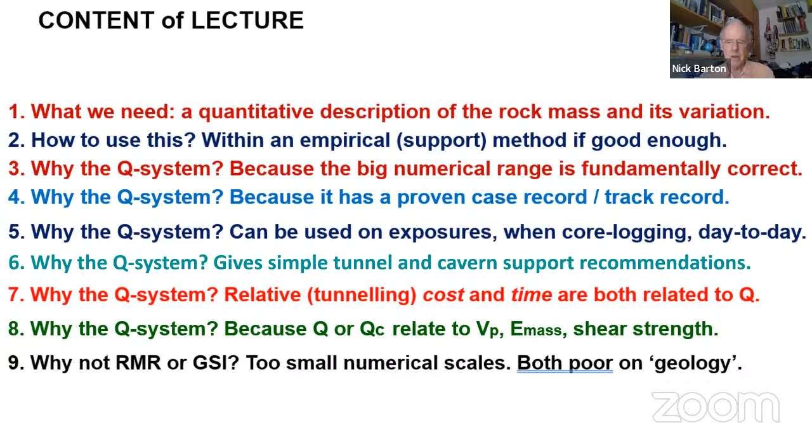So why not RMR or GSI? I think these have too small numerical scales, like 5 to 95, and I think they are both a bit poor on geology. That is my opinion. Especially they don't consider the number of joint sets specifically. Next slide, please.

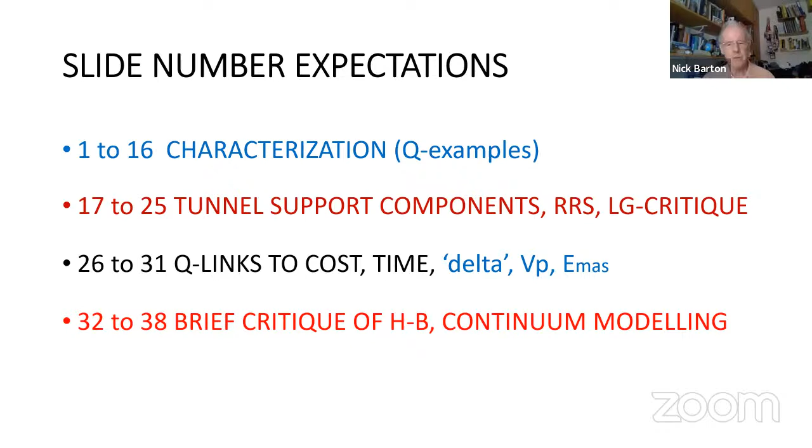So just for a little bit of organization, you'll see the first 16 slides is to do with characterization with photographs of Q examples. Then quite a lot about tunnel support components, including RRS and lattice girder critique. And then some of these Q links to cost and time and deformation delta and VP and EMAS, sorry for the spelling mistake. And the last part, a very brief critique of Hoek-Brown equations and continuum modeling. Next one, please.

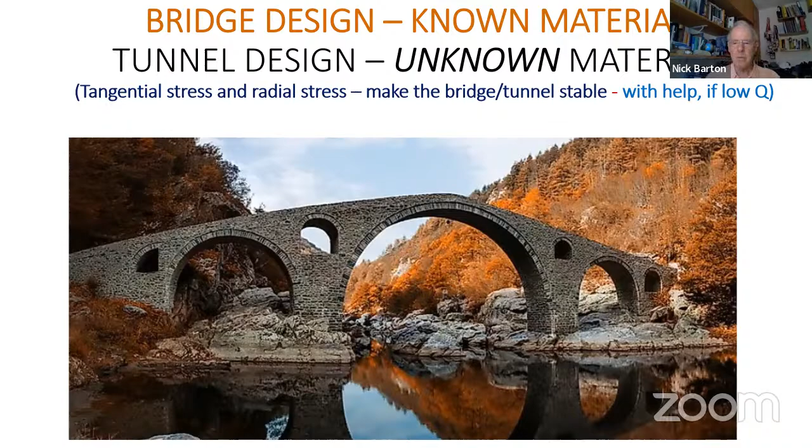So in bridge design, basically one is using hopefully known materials, yeah? And in tunnel design, we have unknown materials, or it depends how well we investigate, how well they're known. And in both cases, we're using tangential stress and radial stress to make the bridge or the tunnel stable. And if the Q value is low, we need some help with the support - if the Q value is too low.

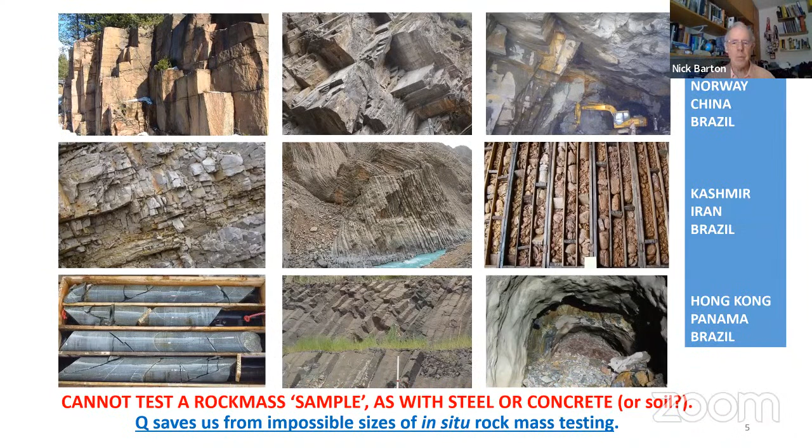So with these thousands of photographs, hundreds of projects, many tunnels, and 40 countries so far and counting, one basic problem is that all the photographs and the rock masses, they're different. So we really need a day-to-day treatment.

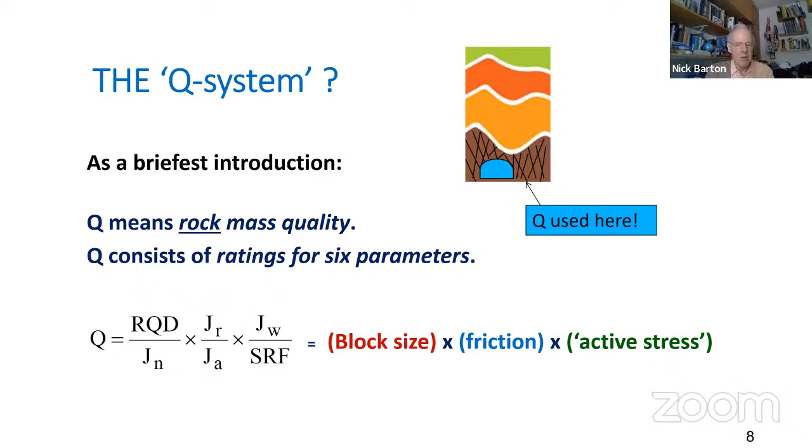So those of you who may not be familiar with the Q system, we use it down in the jointed area and another 1,000 or 2,000 meters below that. We leave the green and the orange for the soil mechanics people. So Q means rock mass quality or lack of quality, and there are ratings for 6 parameters that you see. And in pairs, they look like block size and interblock friction, something we call active stress. Next one.

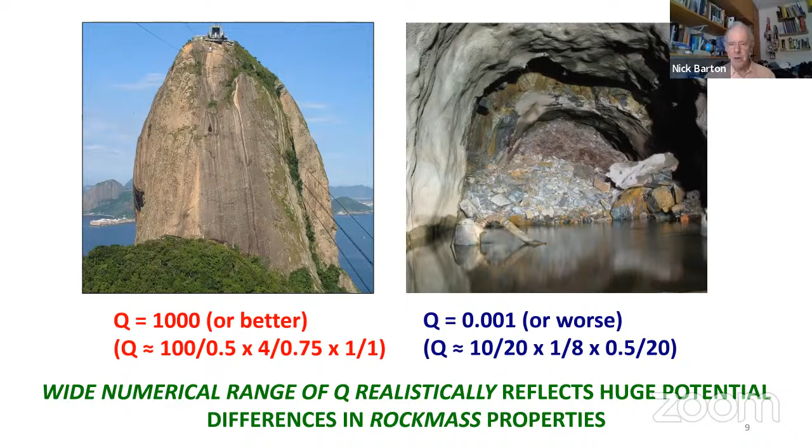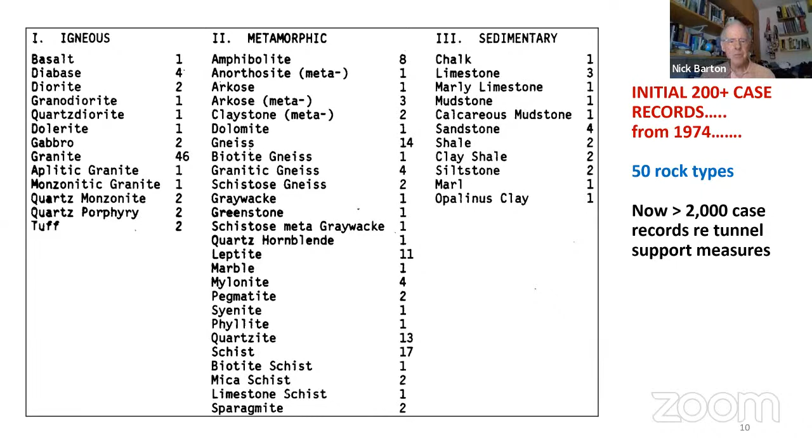Surprisingly, the first 200 case records, when developing Q, already included 50 rock types, a lesser number of sedimentary rocks.

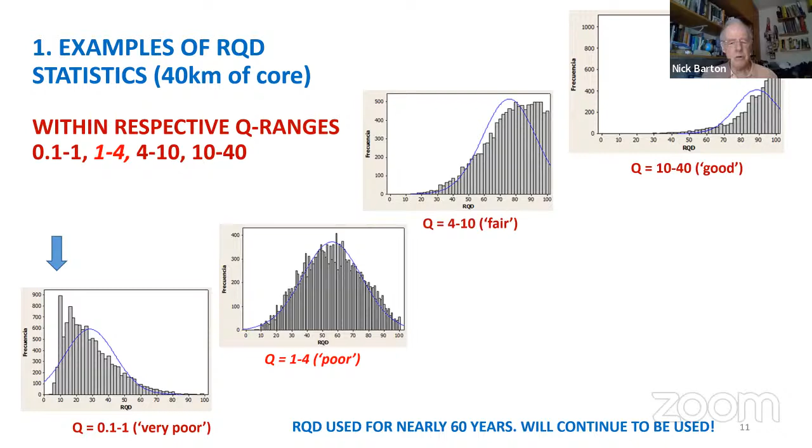If we look at Q equal 1 to 4, the bell-shaped curve, that's a nice demonstration of the usefulness of RQD in setting the stage for moderately low, medium Q values that we call poor. RQD has been used for 60 years, and I'm sure it will continue to be used.

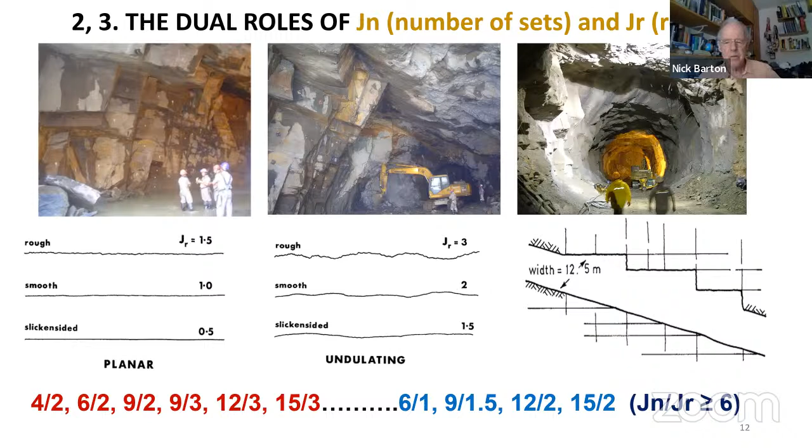Here I've combined the second and third parameters, the number of joint sets JN and roughness JR. In the red numbers at the bottom, you see ratios. The red ratios would be conditions that generally don't cause overbreak, and the blue ratios, as in the photographs, cause overbreak in general because of lack of roughness and too many joint sets. When Jn over Jr is 6 or more, you more or less have overbreak that's difficult to avoid, even with careful blasting.

We're still on the third parameter. This shows a range of roughness getting more and more. We're allowed to use JR of 3.5 if we think it's more than 3 - there's no problem there. So JR determines dilation angle, stability, overbreak, and even failure when the roughness is lacking.

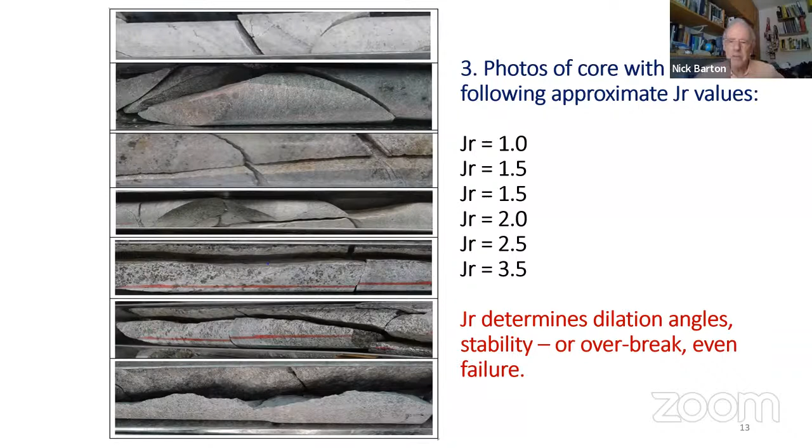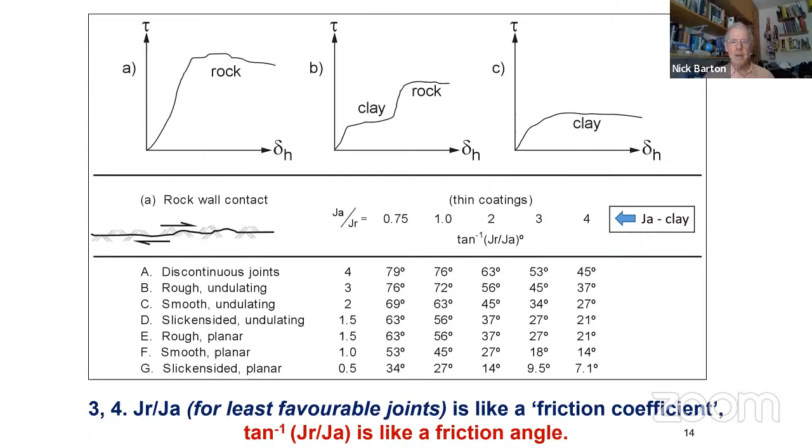Here I've combined the third and fourth parameters, JR over JA. By a miracle, really, the case records on their own gave this ratio in numbers, and when you convert it to tan inverse of JR over JA, it turned out to be like a friction angle. I had nothing to do with that - the case records gave this all on their own. That table shows friction angles one is familiar with. The top left may be phi plus i, or phi plus dilation, and the bottom right may be phi with a contraction.

Q is only part of the rock mass description exercise. On the right you see the 3 pairs of Q parameters. There are a lot of other parameters we collect when describing a rock mass, and if we're doing numerical modeling, quite a lot of the group 2 parameters, the joint character, will be collected. On the left is a way of presenting a large number of Q parameter ratings for RQD, JN, JR, JA, and so on. I will talk very little about JW and SRF - you just see glimpses of them. We've basically covered the first 4 parameters.

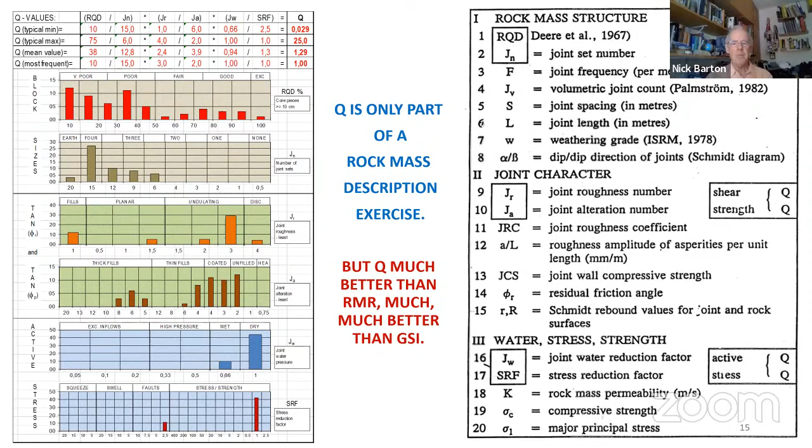Now to support methods for tunnels - more about NMT, empirical, monitoring only with large spans. We don't need to monitor smaller tunnels because we know what the behavior is likely to be if we get the Q value right. We're not going to talk about NATM, but I will show 1 or 2 pictures. It's semi-empirical, and we need careful monitoring.

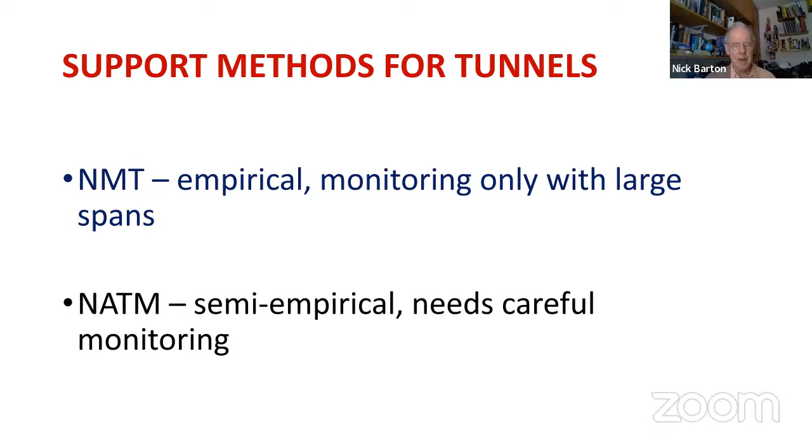So thanks to a publication of NATM, AGS 2010, those are nice diagrams of NATM. We're not going to talk about that, we're going to concentrate on the left side. If you go down those diagrams vertically, 1, 2, 3, 4. In 4, you see two gentlemen up in a cage, and they're inspecting the rock, seeing what the rock quality is likely to be on the next round.

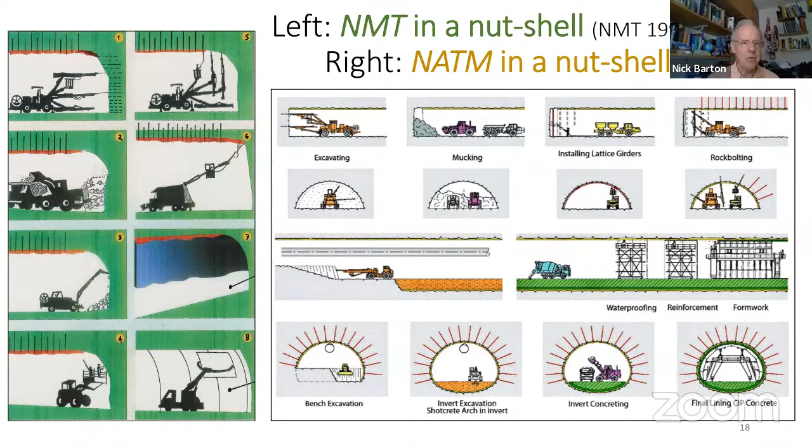The bolt spacing there is exaggerated. It's from a brochure that was made about 30 years ago. We'll see details of bolt spacing in a moment.

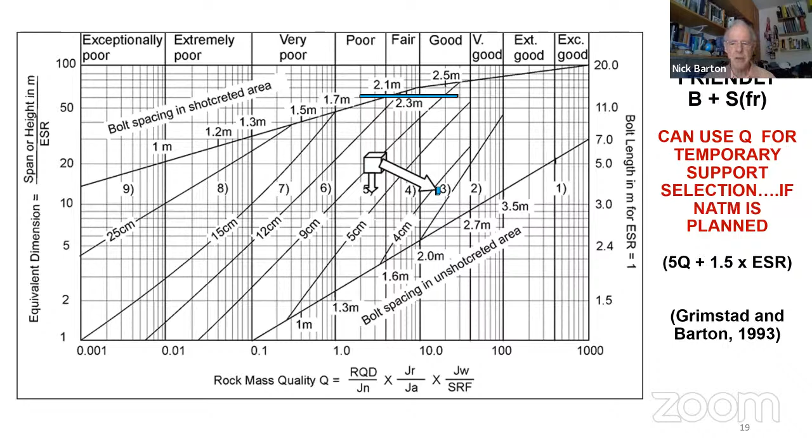So this is the support diagram that was developed by Grimstad from lots and lots of case records. If we go across lower down on the left, you see this arrow going 4, 5, 6, 7, the different thicknesses of shotcrete. And in the top diagonal, you see the reducing spacing of the rock bolting as the Q value is getting less. We can use this diagram for temporary support estimation by using 5Q plus 1.5 times ESR.

So here, photographs of the bolting and fiber reinforced shotcrete, which is preferred to bolting and mesh reinforced. The diagrams are very realistic, actually, from Vandevall, 1991. And we also like the CT bolt with extra corrosion protection.

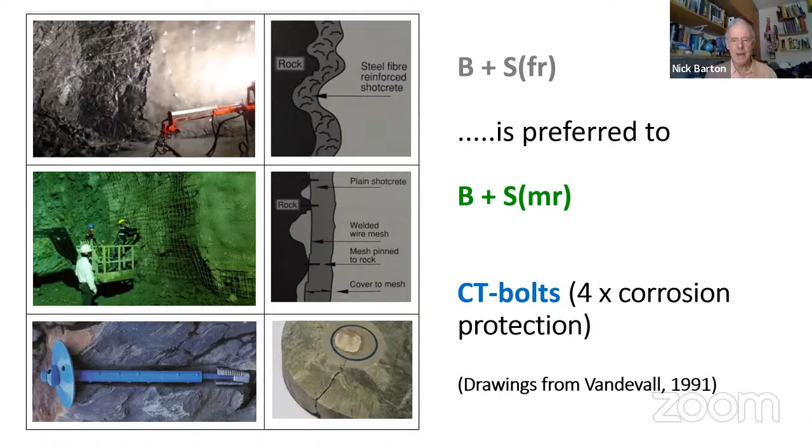There are still four layers of protection after a joint has moved and cracked the outer grout. The bolt is galvanized and epoxy painted, then there's the inner annulus of grout and a PVC tube. So those are really permanent bolts. They cost a little bit more, but if you're relying on bolting and shotcreting for final support, that's important.

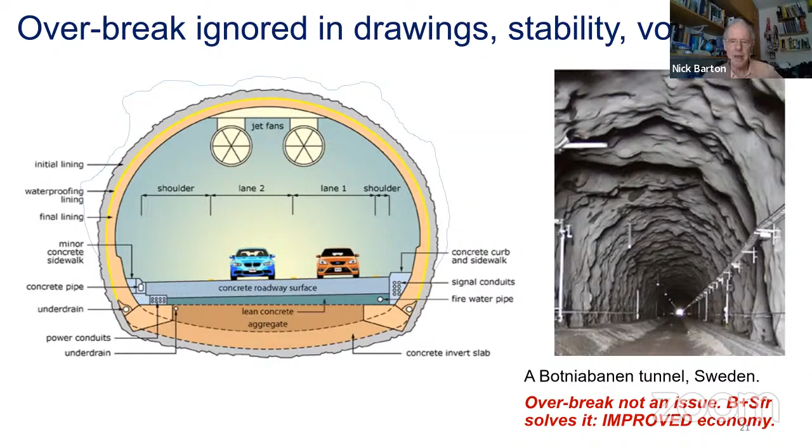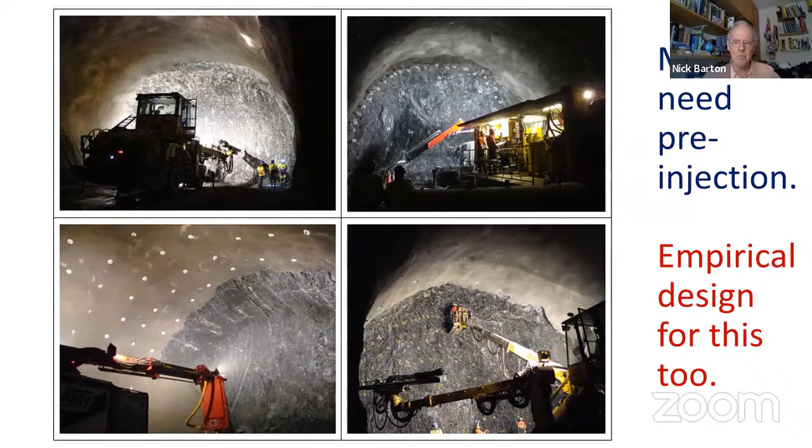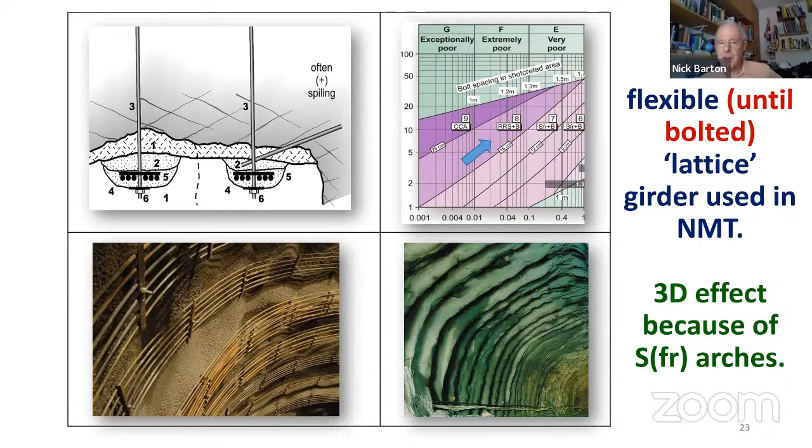So when conditions are really bad, we're in where the blue arrow is in the Q support diagram. We use RRS, rib reinforced shotcrete arches. It's like a bolted lattice girder, but it's more flexible until it's bolted. On the bottom left, you see photographs - they are 16 millimeter bars, which we can slightly bend into a major overbreak. We're not relying on a perfectly circular lattice girder. They're sprayed in, and it gives an extremely stable condition where conditions are bad, and may be combined with spiling, as you see in the top left.

So this is the best diagram to use for the dimensioning of RRS, thanks to the work of Grimstad and colleagues at NGI some years ago. It's the left side of these little white boxes that gives you the area to get the design in the box.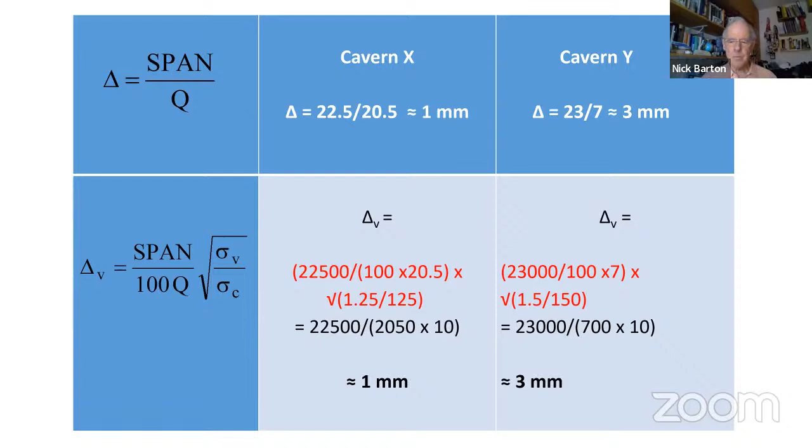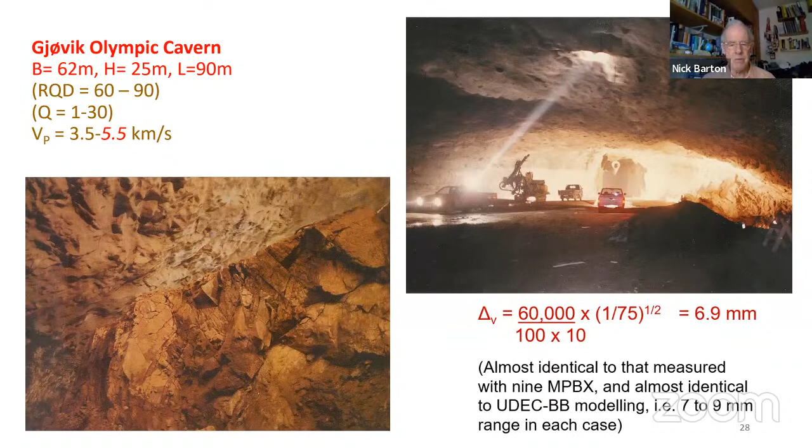Next, applying it to the Gjøvik cavern, we get about 7 millimeter predicted - you see the 60,000 millimeter span in that red equation. This is almost identical to the MPBX monitoring from nine MPBX placed from the surface, and it's also identical to the UDEC BB modeling, which gave roughly 7 to 9 millimeter deformation.

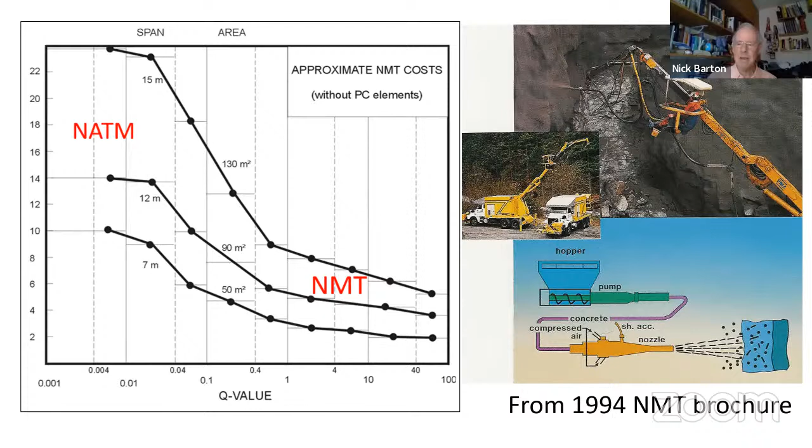Here I've used the Q system for arch and wall support for 3 different sizes of tunnels: small, medium, and a large motorway tunnel. You see the typical relative costs for NMT in the bottom right, and the relative cost for NATM, because you end up with a concrete liner, as some NMT case records would also require - we also use concrete lining if the quality is really bad. On the right, there are photographs from an NMT brochure from 30 years ago, showing a specialty: we like the operator high up on the boom to do the best shotcreting, especially in big tunnels, caverns, and slopes.

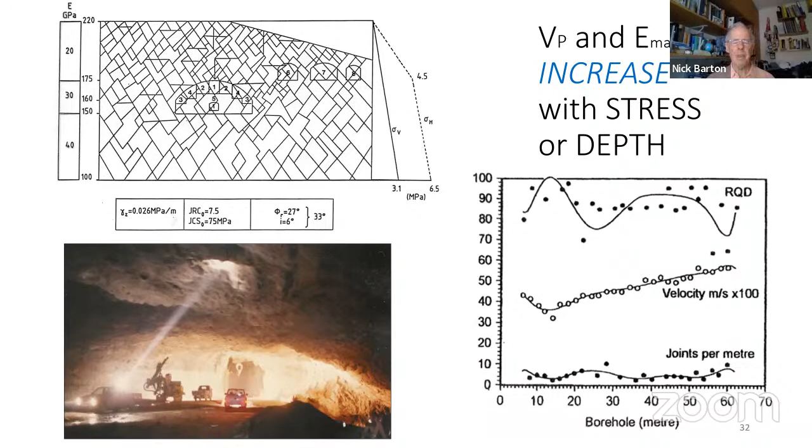We can estimate a relationship from empiricism between the P-wave velocity from shallow refraction seismic, the scale on the top left, and the Q sub C scale - that's the Q value normalized by sigma C over 100. Those two equations in blue and black show how you can estimate the E mass, the rock mass deformation modulus, as VP increases with depth, which it generally does. The depth dependence must not be ignored.

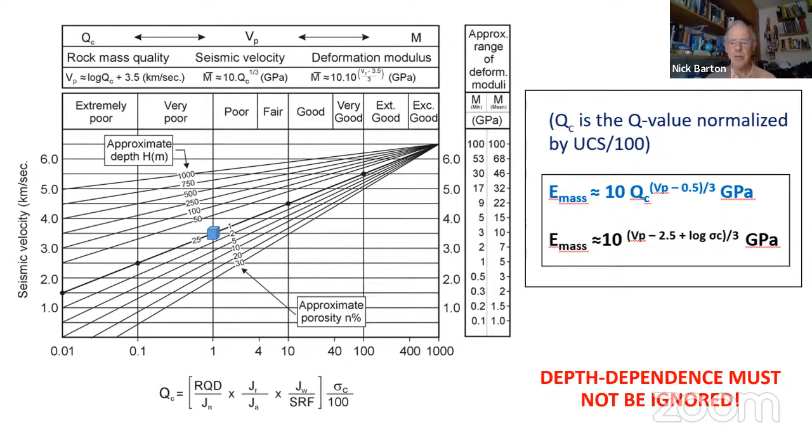To finally critique, on almost the last 2 slides, some modern trends.

So these extraordinary equations, I feel that they're extraordinary - they take such a long time to write unless you copy them. Amazingly, the GSI effectively appears 16 times in the equation for C and 12 times in the equation for phi. To me, GSI, although it's got geological in the name, isn't really geological, and it's not very easily quantified. And D is the disturbance factor - it's really a joker, because you can get nearly any result by varying D from 0 to 1.

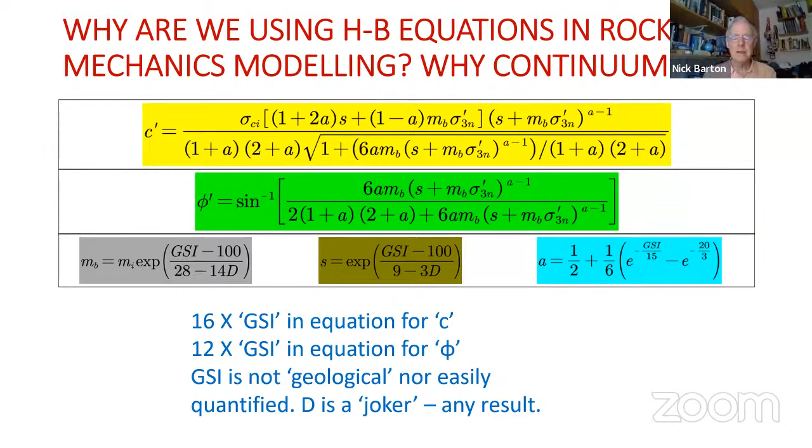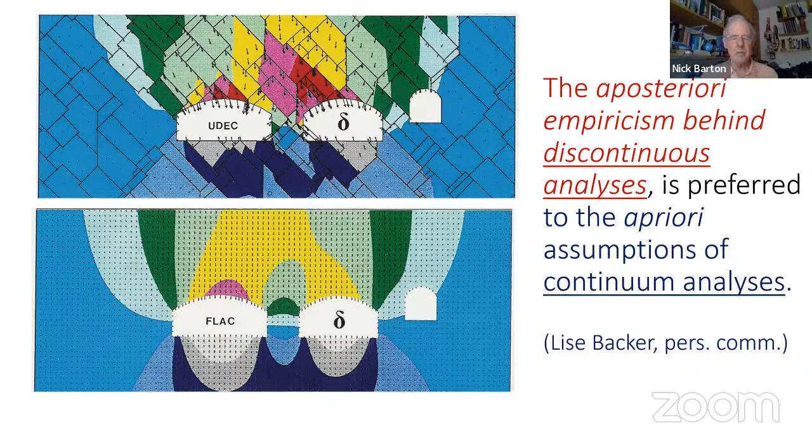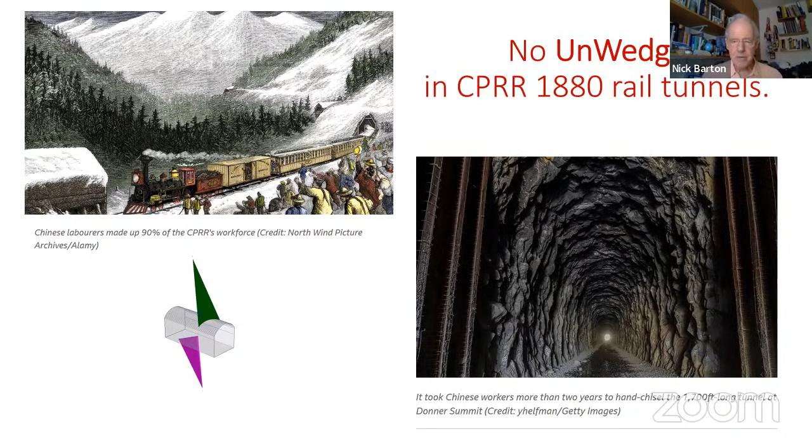So this is the end, and this is the same tunnel that you saw earlier with a very low inflow for 5 kilometers, and very high Lugeon range before the pre-injection. So pre-injection may be a very important part of NMT.

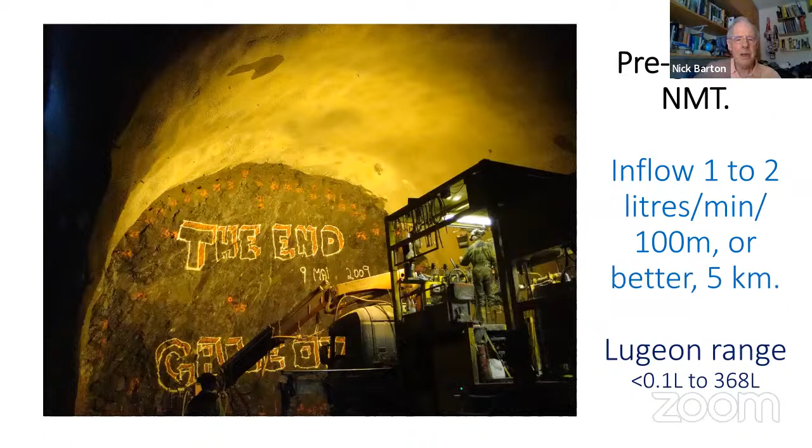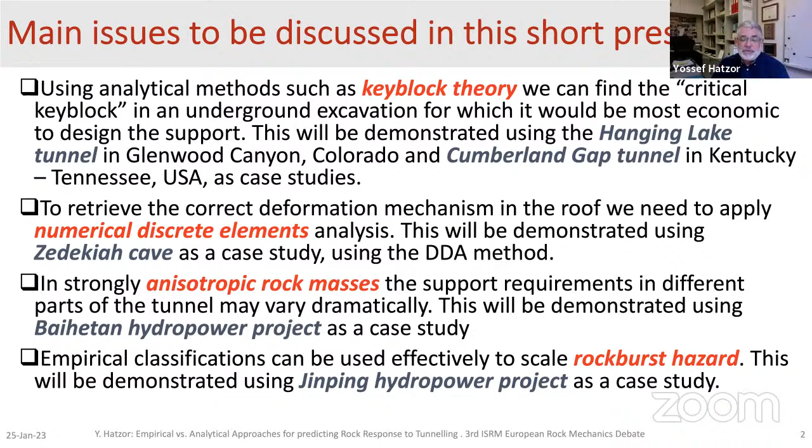As you all know, rocks are discontinuous, and therefore, as also reflected in the Q system, the discontinuities play a major role. What I want to argue here is that the orientation of the discontinuities cannot be ignored. So I'll go through several case studies, starting with 2 tunnels in America. This is from my PhD work. And in a sense, this presentation will go through my career, starting from the PhD work in the early 90s, through some works in Israel in the 2000s, and then in China between 2010 and now.

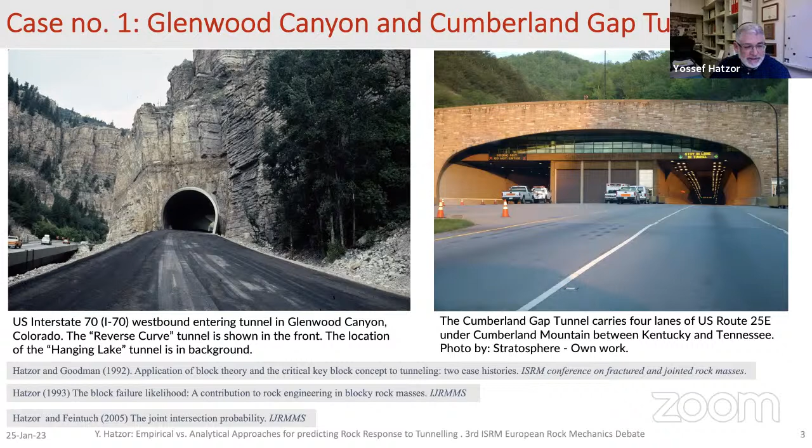So these are 2 tunnels that we used as case studies to validate block theory, and that was just then published. Together with Professor Goodman, we went to these tunnels and looked for evidence that block theory is indeed able to predict failures in the rock. So 2 tunnels, one in Colorado, the other in Tennessee, Glenwood Canyon and Cumberland Gap. And the work was published in a series of papers, as you can see there.

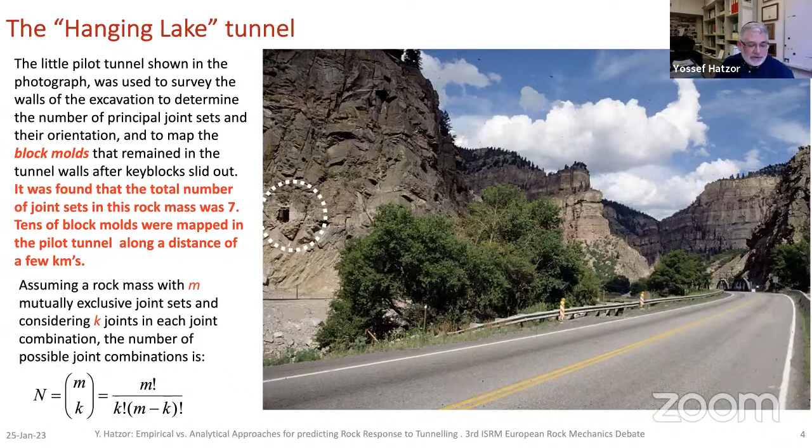So in Glenwood Canyon, they excavated this pilot tunnel. You can see that this pilot tunnel is within a wedge in the rock. And the rock mass turns out to have 7 joint sets. If you have 7 joint sets and you want to consider combinations of 3 joints in every block, you're going to end up with about 35 possible joint combinations. Now, that's not realistic. And why do I say 3?

Because we often find in the field that the blocks are tetrahedral, meaning there's 3 joints intersecting at a point in the apex, and then there is the free surface. And the reason they're predominantly tetrahedral is that the probability of obtaining 4 joints intersecting through the same point diminishes very rapidly to zero. Therefore, we always find tetrahedral blocks, and this is why we're going to have to analyze 35 different joint combinations.

Now, in each one of these joint combinations, there are theoretically 8 possible joint pyramids. If you're not familiar with block theory, here is an example from Goodman's book. We have 3 joint sets, and their intersections form joint pyramids in space. Each one has its own code, and Shi's removability theorem says that the removable joint pyramid is the one that is completely contained in the space pyramid. So we're going to have 35 theoretically removable joint pyramids from every free face. That's too many.

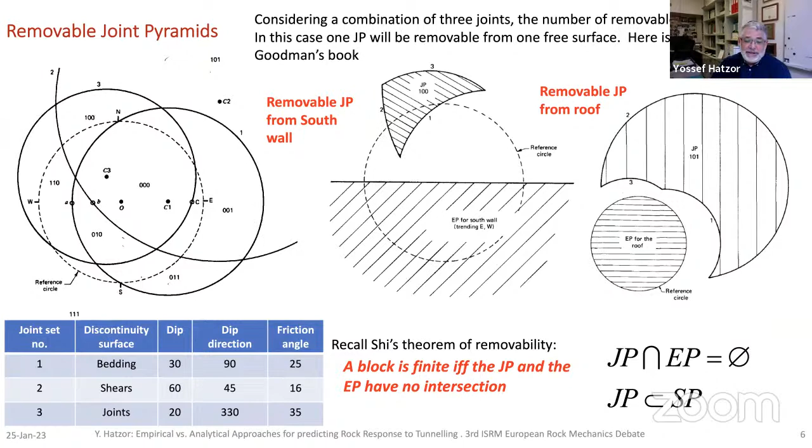And that's when I came up with the idea that the probability for different joint intersections is not the same. We came up with this concept of block failure likelihood. There are two criteria for this: one is the joint intersection probability, and then there's the stability of the removable joint pyramid that is formed. The joint intersection probability is simply inversely proportional to the volume of this parallelepiped. So the smaller the spacing, the higher the probability, making it occur more often in the rock mass.

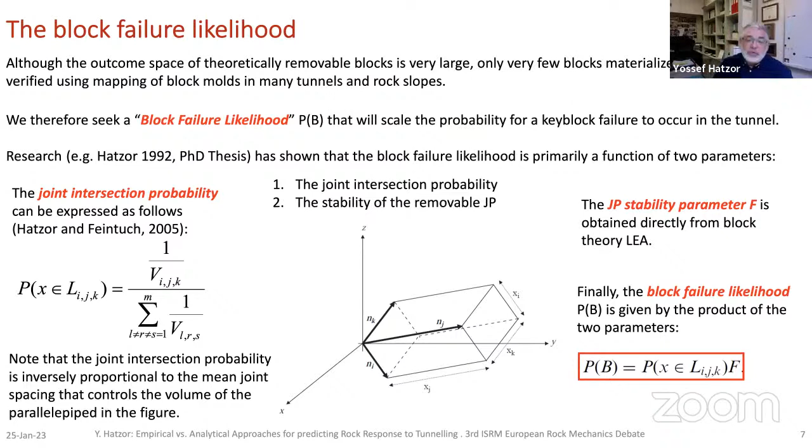And then we have to run through these occurrences a limit equilibrium analysis to weigh the stability of each of these removable blocks and come up with the block failure likelihood.

So a lot of these theoretical combinations don't yield removable blocks that we need to be concerned about. And that means that running such an analysis isn't so complicated. We can actually define one or two blocks that would be critical for a given free face, design for it, study its maximum length, and then dimension our support accordingly.

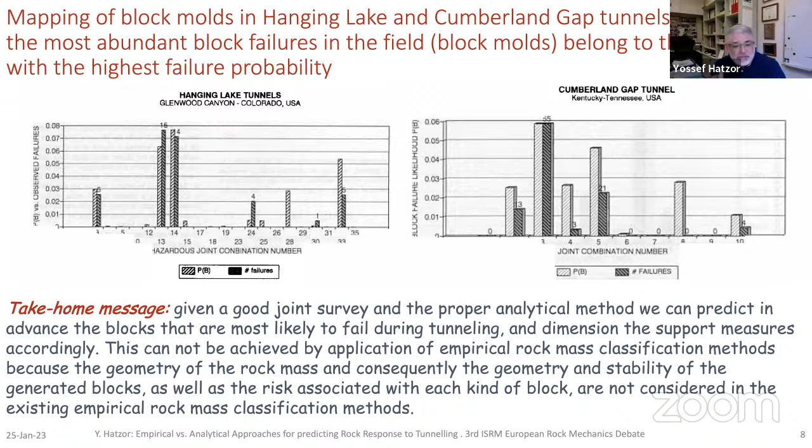So this is the issue of block failure likelihood. This is not something that can be done with conventional classification methods. I'm not distinguishing right now between the existing methods.

The other thing I want to point out is that the deformation in the roof is not only a question of rock mass quality, as Nick proposed with his empirical equation of span over Q. It's very interesting that he was able to validate that. But in fact, the interaction between the blocks in the roof plays an important role.

So this is just an example of a historic site. I spent a lot of time in my career working on preservation of ancient sites underground and on the ground, slopes, tunnels. This is the Zedekiah cavern underneath the old city of Jerusalem, and it's been standing there for at least 2,000 years, probably more like 3,000 years, anywhere between 2,000 and 3,000 years before present.

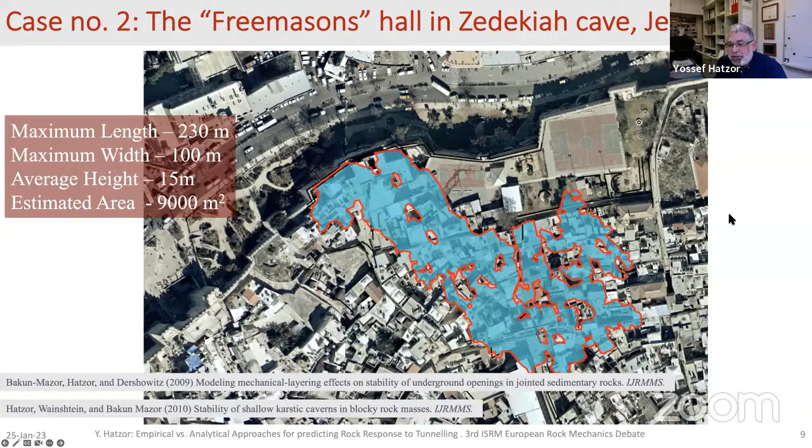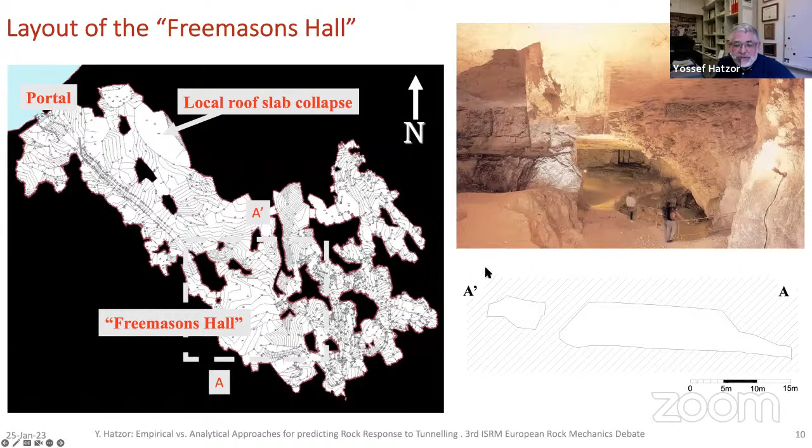Historians tell us that the dimension stones for the temple were quarried in that limestone quarry. Within this quarry we have a hall called Freemasons' Hall, because the Freemasons used to hold their initiation ceremonies there. Anyway, it's a large span room that has stood unsupported for thousands of years. The question is, why is it standing? How can it be stable for so many years?

If we run a clamped beam analysis on this layer of the roof, we get a maximum tensile stress of about 10.5 megapascals. But the tensile strength of the rock is only 2.8 megapascals. So if this was the model, it must have failed in tension.

If we go to Brady and Brown's book, where they discuss the voussoir analog, you divide the immediate roof into two blocks and let them rotate a little bit, developing compressive stresses here and here. Then there are three different kinds of failure modes that could happen: one is crushing under the maximum stress, one is shear along the abutments, and the third is a snap-through buckling mechanism.

Running this analysis on Freemasons' Hall gives us the buckling failure mode, because the layers are thin and the span is large. But it didn't happen. It didn't happen. So both methods of analysis don't work.

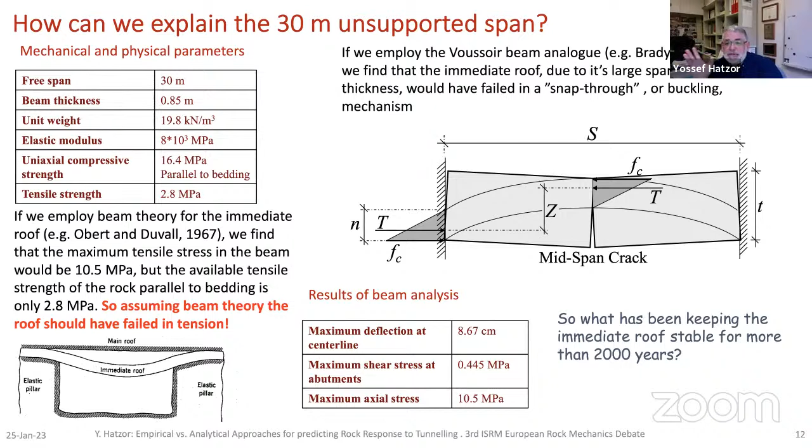This is my second point: we need to consider the interaction between the blocks. So here we have a DDA mesh of many blocks. Notice that the structure here is geological, not just vertical and horizontal lines cut together. You can see joints terminating against layers, cross joints and non-crossing joints. A lot of effort has gone into generating a mesh that properly represents the sedimentary rock structure.

And what's going on is you can see the arching stresses developing around the hall, and then some shear developing along those two abutments. But then after some shear, there is an arrest of the motion and a development of arching stresses through the immediate roof.

You can see it here. This is the vertical displacement. So if this is the lowermost layer measurement point, it goes down and then it stops. And that's when the horizontal stresses reach their maximum value and the displacement is arrested because of the arching mechanism.

I don't think we could have predicted this without applying a specific analysis that considers the interaction between the blocks. This is another issue that requires us, after we've established the rock classification, to go further to a more specific analysis considering the interaction between blocks.

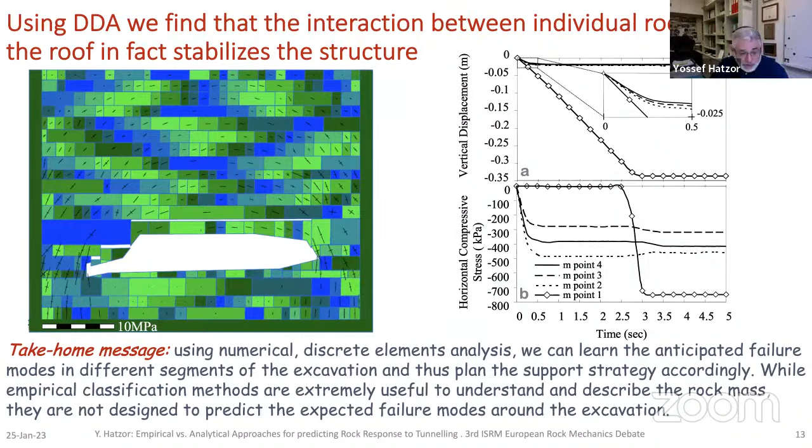The third case is from China, the Baihetan project. It's a huge hydropower project. You can see this river, which is on the boundary between two provinces, Sichuan and Yunnan. It's going to be 300 meters high.

And the geology is tricky. We have a contact here between columnar jointed basalt and sandstones, and everything is going to be within the columnar jointed basalt. You can see it's anisotropic, with prisms dipping into the tunnel. How do we handle that?

Again, we can draw a mesh. This photo tells us where we put the measurement points in the mesh. We do sequence excavation in the model, removing the top heading, then the center part, then the bench, and we study the deformation after imposing the initial stresses. This mesh represents the mapping exactly as it is in the field, with the initial stresses as measured in the field.

You see that the three immediate points, 1, 2, 3 in the roof are all sliding down. So 9 meters above the roof—this is just one of the powerhouses on the way—we see that the whole thing is sliding down. Now, the other measurement point, number 4, at a distance of 25 meters from the roof, stops; it doesn't slide. So somewhere between 9 and 25 meters above the roof is where it stops sliding. We need reinforcement that goes beyond those 9 meters.

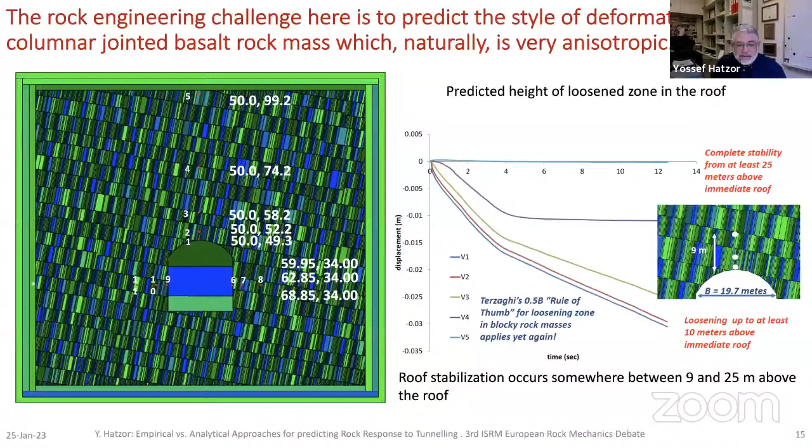Could this have been predicted without such an analysis? Moreover, you can see the deformation in the two side walls. In the right side wall we get sliding, and it tells us where the sliding stops, the loosening zone. In the left wall we see rotation—here's the rotation angle in radians. You see that point number 9 is actually rotating because of this structure that favors toppling.

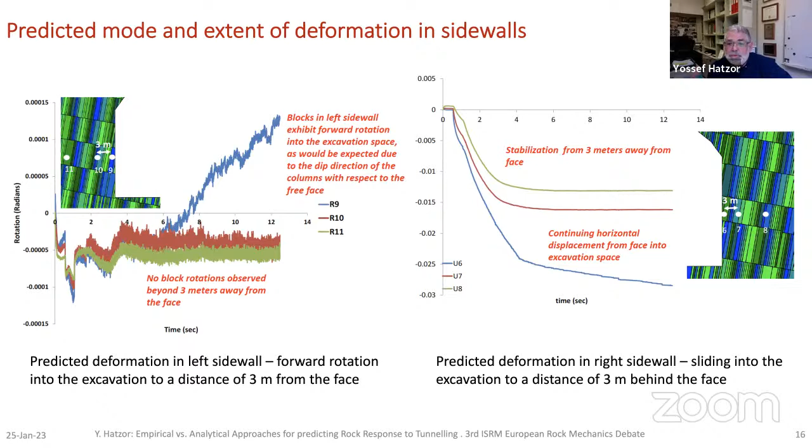So the third point I want to make is that applying such an analysis gives us the failure modes that will develop around the tunnel. To confirm this, the MPBX measurements show that the maximum displacement in the roof is about 9 meters above the roof, and then it stops at a distance of about 20, which is basically what we predicted, and the same with the side walls.

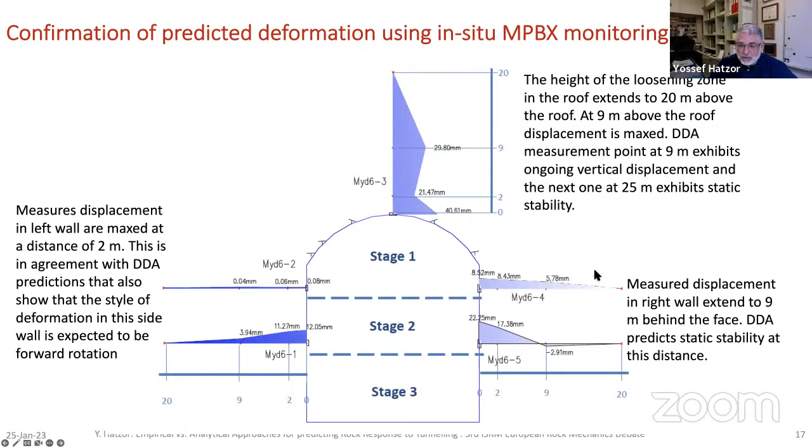Now, their approach to the support of this chamber followed T.A. Lang's guidelines for dimensioning rock bolt reinforcement. They came up with a length of 6 meters, spacing of 1 meter. They did some longer lengths on the sides, but basically the roof bolts here are only 6 meters long. As we saw in the analysis before, it's not long enough. The reason for this mistake is that they did not consider the structure of the rock, because T.A. Lang's guidelines take the average block size to scale the bolt length.

What I'm arguing is that in the roof, the average block size would be the distance between those basalt layers of the flows of basalt, so about 5 meters. If you go by the rule of 3B, you need at least 15-meter-long bolts. In the side walls, the width of the block is very small, about 30 centimeters, the width of the columns of basalt. So there we use the other criterion, about 1/4 of the span, which gives us 5 meters. If they'd gone with that approach, it would have been safe.

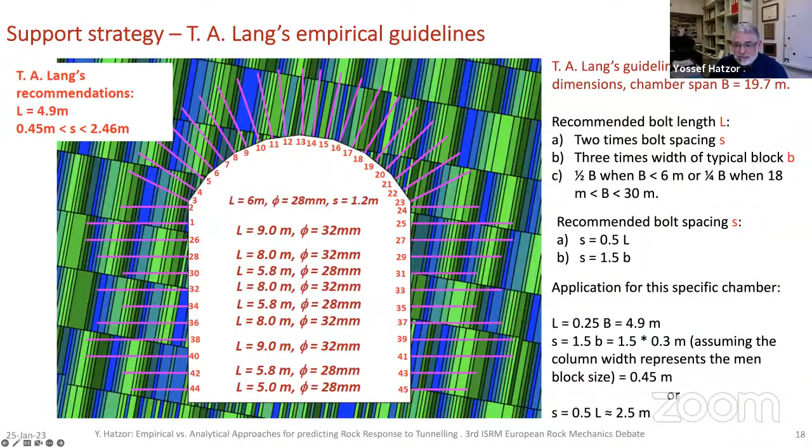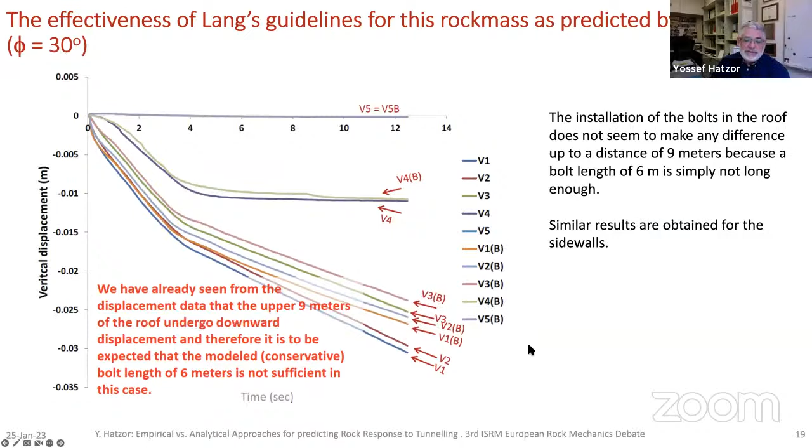You can see that when we apply the bolts the way they designed it, nothing happens—everything is sliding down because it's not long enough. If we consider the anisotropy of the rock mass, that requires 15-meter-length bolts or cables in the roof, and about 5 meters length bolts in the sidewall; then they would have been safe. So that's my third point, the consideration of anisotropy.

And finally, something that is in favor of classification methods.

I use the GSI here, but I could have done it just as well with RMR or Q, so please don't attack me for using the GSI, but I'm going to show you that classification methods can be very useful.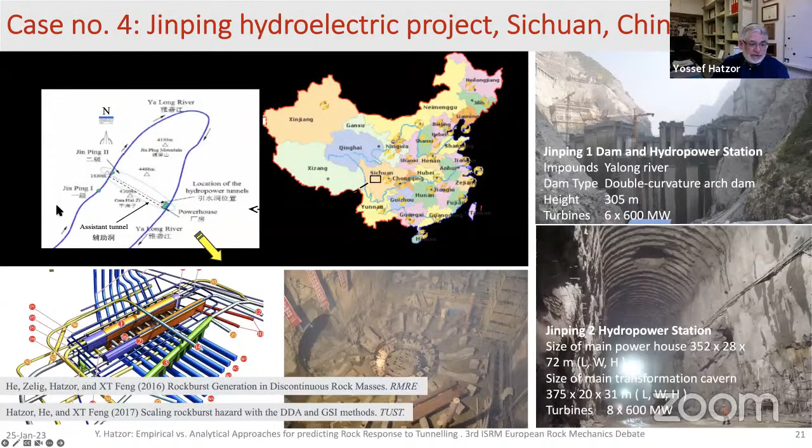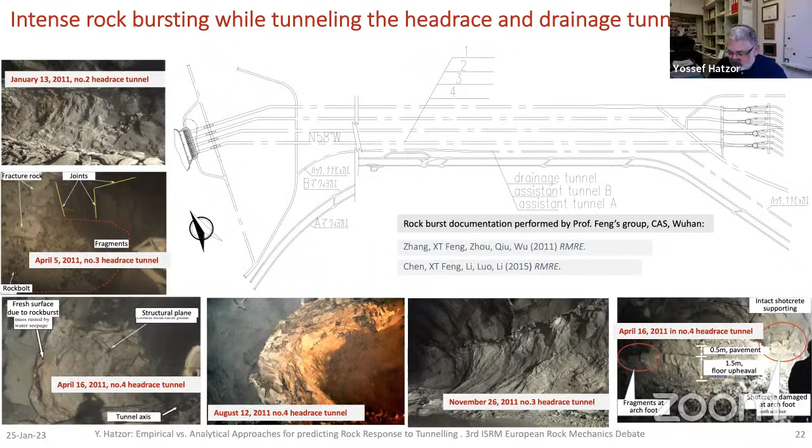What happened was that they encountered a lot of rock bursting while drilling, excavating those head race tunnels and the drainage tunnels. A lot of rock bursting, a lot of delays and a lot of risk for the workers throughout the excavation. And the question was, can we predict the intensity of the bursting?

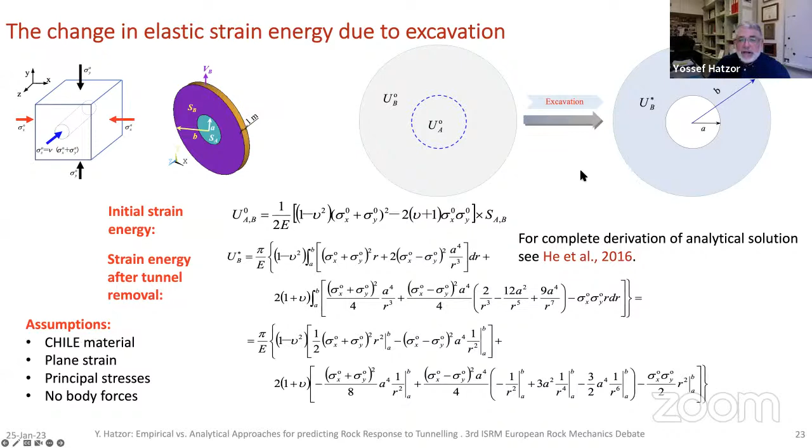So I collaborated here with a postdoc, He Ben-gu, now at Northeastern University, together with Professor Feng Xiating. And he developed the analytical solution for the energy concentration. So the strain energy before tunneling, and then the energy concentration after removal of the tunnel, so we know the difference, and of course for the relevant material and so on.

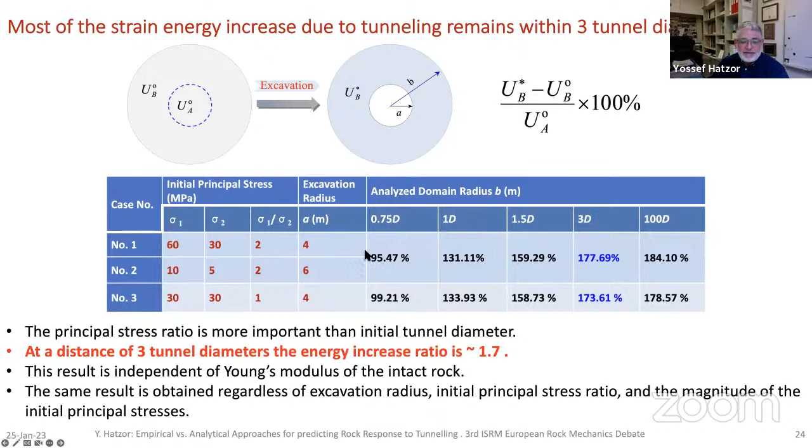So what we find in his solution is that once you go beyond 3 diameters away from the center of the tunnel, it doesn't really matter anymore. So this is the affected zone of about 3 diameters. And if we want to consider jointing within this annulus that is mostly disturbed because of the tunneling, now we have a tool to calculate the energy, this is very useful.

But my argument is that if you have pre-existing discontinuities, and they're favorably oriented, then of course the shear strength of the discontinuities is lower than the shear strength of the intact rock. And if they're favorably oriented, blocks will fly out much before the rock will fracture in compression or tension.

And indeed, when they map it, they see that blocky rock masses generate most of the rock bursts, where intact massive rocks generate much fewer rock bursts, and disintegrated rock also doesn't generate too many. So that is the motivation.

Now that we have this equation, we know that the increase in the annulus, that is the affected area, the increase of energy is 1.7 plus the original, times the original energy. That has to be balanced by the elastic strain energy of the blocks, the kinetic energy of the blocks that move, and the shear energy that is being dissipated through shear. So that is the equilibrium of the energy.

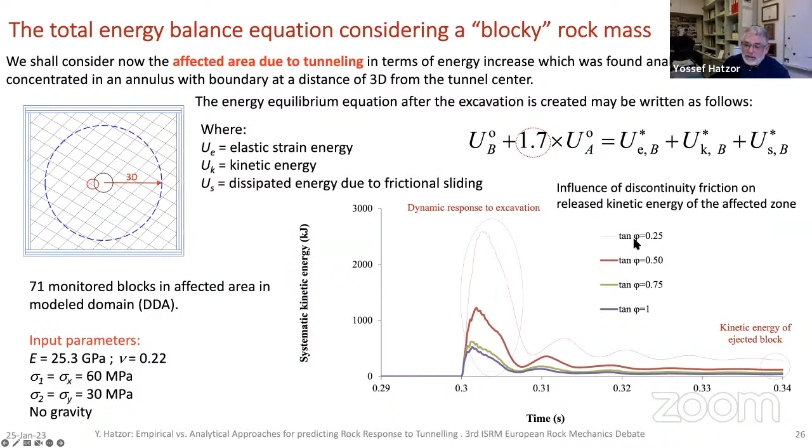Now, when we only take the kinetic energy of all the blocks in this annulus following the excavation, which we can obtain because we have the velocity, for example, in the DDA model of each block at every time step, we can see how the friction coefficient affects the kinetic energy that is being released. When friction coefficient is low, we have a lot of energy, and then as we increase the friction coefficient, the energy goes down.

And for example, if we want to use this approach to study mitigation, we can say, if we go full face, we're going to get a very strong seismic event. However, if we go top heading and bench, if we just remove half the top heading, half the height, this is the first event, and this will be the second event.

If we first remove a third, we'll have a small event, but then we'll have a higher event when we remove the other two-thirds. So we can use this kind of calculation.

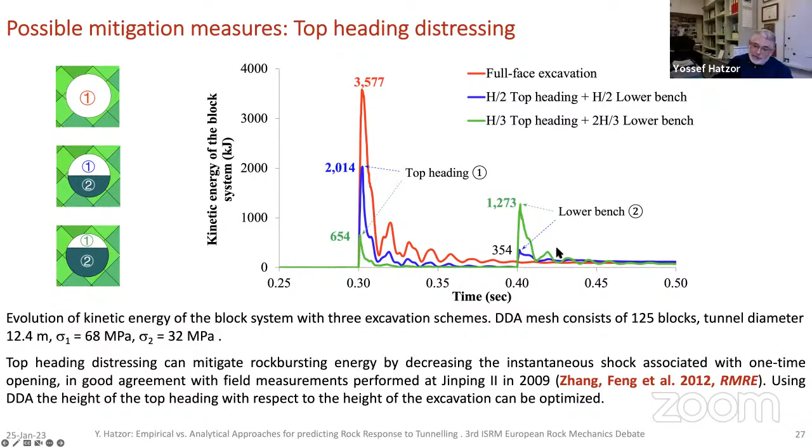What I wanted to say is that to study the rock burst risk, or to be able to predict the risk, we can consider the rock mass structure. I did it with RMR in one work, and now I did it here with GSI. I probably could have done it with Q as well. The reason I chose GSI here is because it has those nice illustrations of the rock mass structure, which I can use to replicate in DDA.

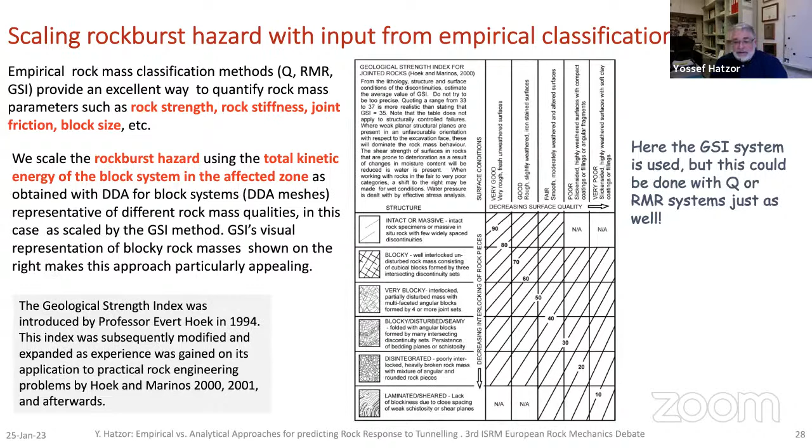And how I do this, I invent numbers. Just out of my head, I say okay, GSI 50, alright, 4 joint sets. I'll give them some orientations. That will be the total number of blocks in the mesh. I will do this kind of spacing. Now, important thing I want to point out is that spacing is not the only parameter that is important. Also the length of the joints and the bridge between the joints.

So you can see these parameters, because that's what is responsible for the interlocking. If we just generate long, infinitely long joints, we get an artificial mesh of lines that intersect one another, and the deformation pattern will not be realistic. But if we consider spacing, length, and bridge, then we are getting a more realistic, more geological, as Nick said, picture.

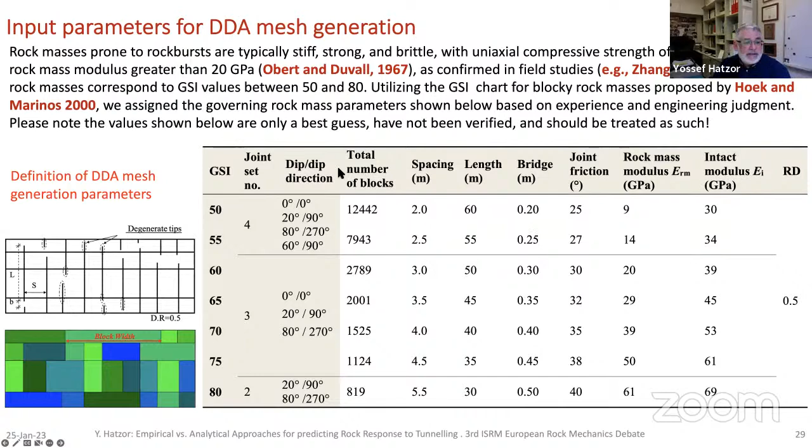And now I assign just friction angles for the different GSI values and the intact modulus from the rock mass modulus. So these are all my own guesses, okay? And so I can generate meshes that correspond to different GSIs.

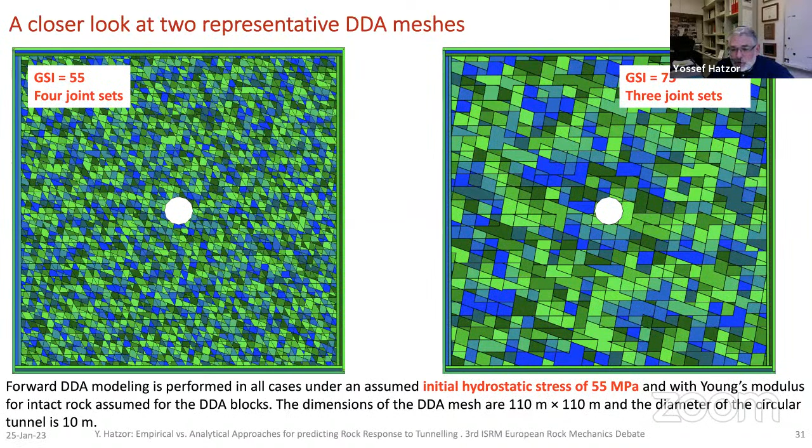So that means that the empirical classification methods can be a great input for numerical analysis to do this kind of calculations, because the engineers and the engineering geologists spend a lot of energy characterizing the rock mass, classifying it according to the different methods, and now we can do this kind of analysis.

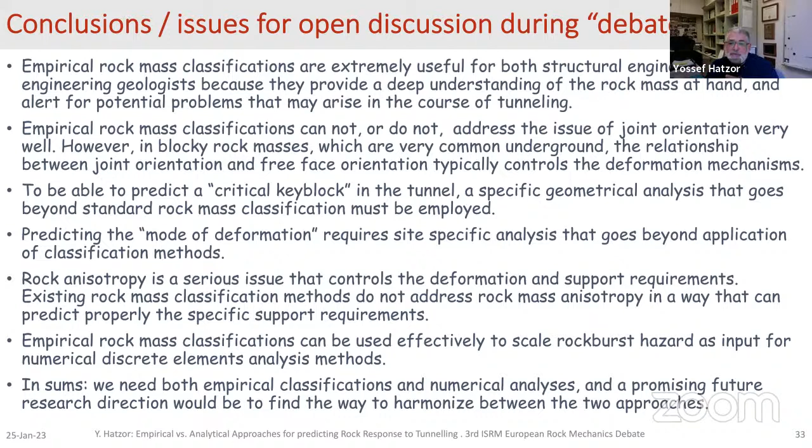I think we need both empirical classifications, and I like the Q system very much, let me say that up front. So I think we need both, but we also need the numerical analysis, and we need to find a way to harmonize between those two approaches in an effective way.

So this is the Zedekiah cavern today. They're considering reinforcing now the roof with rock bolts, which I think is very wise to do, because even though the numerical method shows that it's stable, it's very marginally stable and needs to be reinforced, and they are now working on that. That's it. Thank you very much.

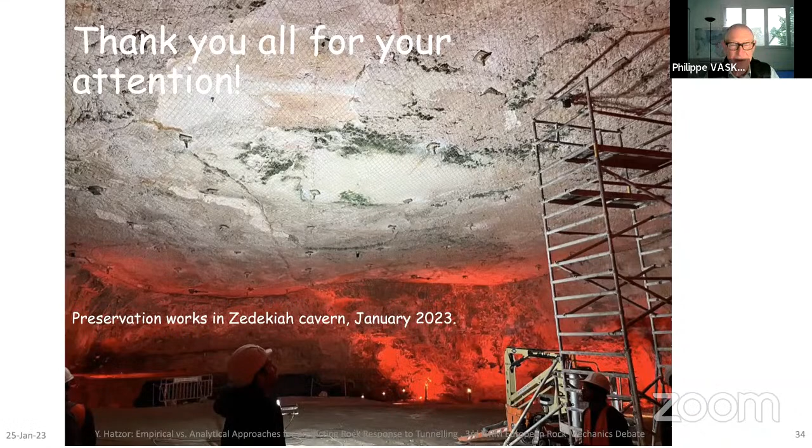Thank you, Yossef. Thank you to the two presenters for these extremely interesting presentations. We have all seen that both of you try to incorporate and use as much as possible the geological conditions, which is great.